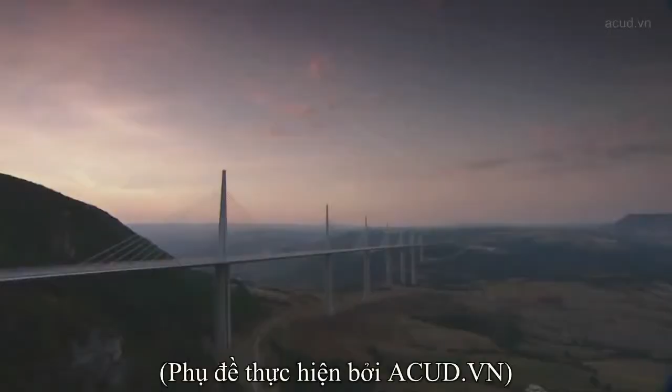This is the Millau Viaduct, the tallest bridge in the world. Its highest tower stretches a staggering 343 meters. So high, the bridge glides above the clouds. But this is a megastructure they said couldn't be built. When I've shown first the drawing of this bridge, they really thought I was crazy.

The team attempting to build this amazing freeway in the sky had to survive landslides, fight winds gusting at 130 kilometers an hour, and weather massive storms as the bridge simply hung in the balance. It's a bridge that pushes the boundaries of engineering to the limits, and then beyond.

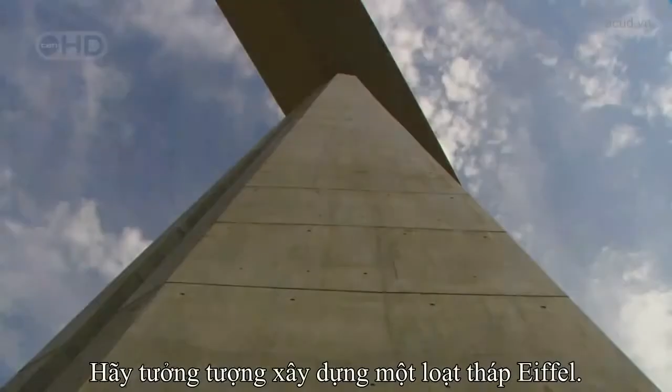Imagine building a series of Eiffel Towers, then slinging a 4-lane highway between them, all the way across one of the deepest valleys in France. Impossible though it sounds, that pretty much describes the building of the Millau Viaduct.

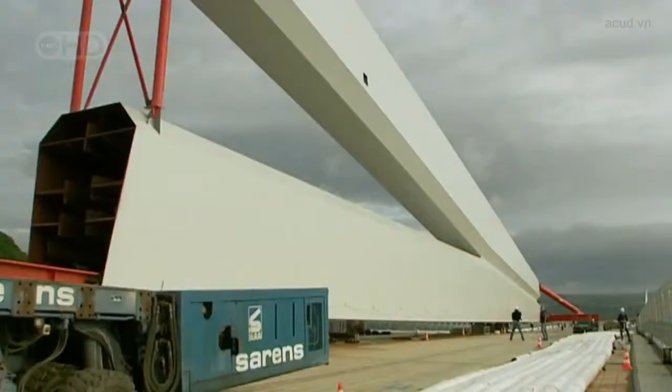From the start, the construction team faced 3 daunting challenges. 1, build the tallest bridge piers in the world. 2, put a 36,000-ton freeway on top of them. And 3, erect 7 steel pylons, each weighing 700 tons. And what's more, they had to do this hundreds of meters above solid ground. So high that if you were on top of the Eiffel Tower, you'd still be looking up at this awesome bridge.

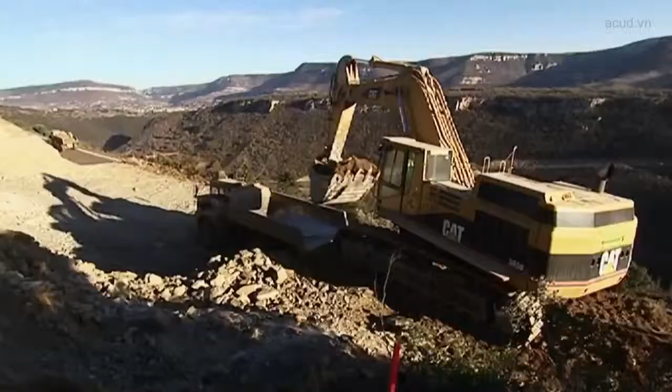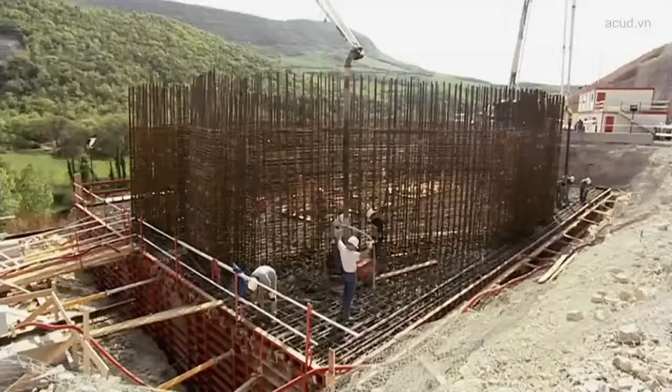October 2001, the team break ground. They're required to build a bridge that'll last for 120 years. And to win the contract, the teams promised to build it in record time, less than 4 years. By comparison, the world's longest suspension bridge, the Akashi Kaikyo in Japan, took a full 10 years to build. To up the ante, any delay will cost them $30,000 a day in penalties.

There are 7 piers that are numbered from the northern end of the valley. Number 1 will pose problems because of the steep slope. Number 2 will be the biggest challenge since it's the tallest. Crossing the river, number 3 is not much shorter. Then 4, 5, 6, and 7 climb the gentler slope to the south.

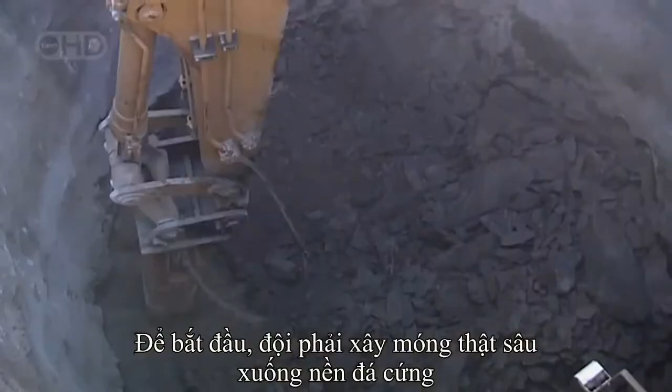To begin, the team had to bury the foundations deep in the bedrock in order to support the enormous weight the bridge will place on them. But the forces of nature were stacked against them. Geologists have warned of the risks posed by the region's fractured limestone. The rock is full of cavities that are essential to the local cheese economy. These cave systems close to Millau are home to a unique bacteria responsible for the blue mold in the world-famous Roquefort cheese. But what's perfect for cheese could be disastrous for a megastructure.

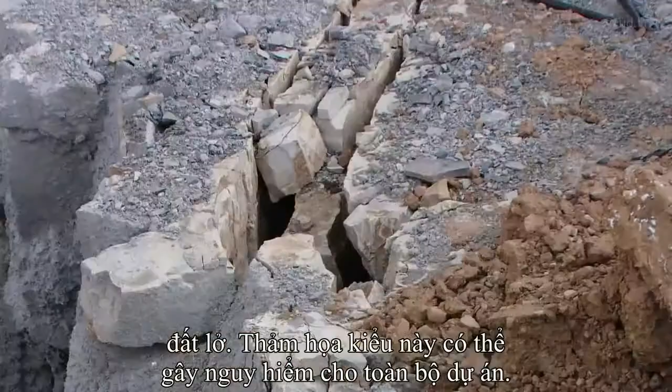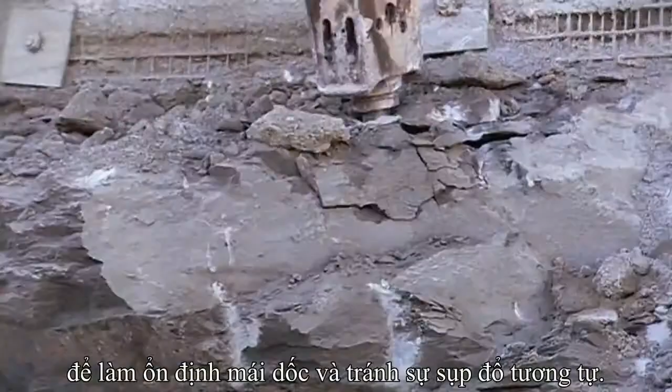The geologist's diagnosis spelt one thing: landslides. This kind of catastrophe could jeopardize the entire project. Despite the warnings, building went ahead as planned. Then, well into construction, as predicted, a dramatic storm causes a landslide. 4,000 cubic meters of rock collapse around Pier 1. Fortunately, the fallen rock doesn't damage the pier, but the warning is clear. They're forced to divert precious manpower and equipment to stabilize the slope and prevent a repeat collapse.

So if the area is prone to landslides, why did they build the world's tallest bridge here in the first place? The answer is simple. In the 1980s, France built a freeway linking Paris directly with Spain. This major artery headed south across the French countryside, while from the Mediterranean, the freeway headed north, until they both hit one of the deepest valleys in France and stopped dead. Welcome to Millau, France's least favorite bottleneck.

The town of Millau is in the mountainous region of the Massif Central, one of the most tranquil parts of France. But in summer, this poor medieval town suffered traffic hell. The locals couldn't take it anymore. Neither could their mayor. It was terrible for our reputation. When you hear every day on the television and radio, avoid Millau, there's a traffic backup, a 5-hour wait in Millau.

And it's not just the people of Millau. Two drivers, Jamila and Jemima, crossing the 30-odd kilometers between the freeway on either side of Millau, reveal exactly why this bridge is needed. Jamila, in car 33, will cross the new bridge, while in car 22, Jemima will take the old road across the valley floor.

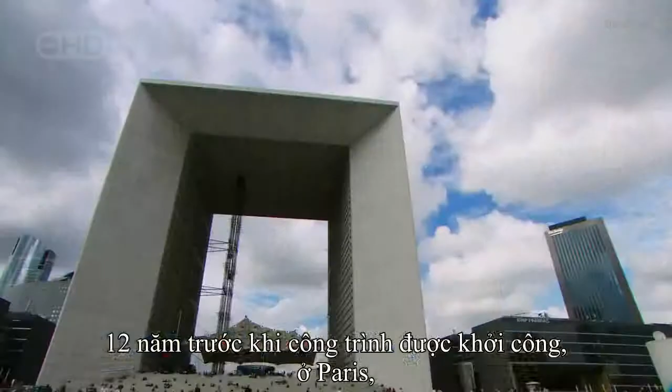12 years before construction began up in Paris, the Ministry of Transport first came up with a plan. Their head bridge builder, Michel Virlogeux, is no ordinary engineer. He's a man who thinks big, very big. Like the Normandy Bridge in northern France, the longest cable-stayed span in the world. With this record-breaking structure completed, Virlogeux was on to his next, Millau.

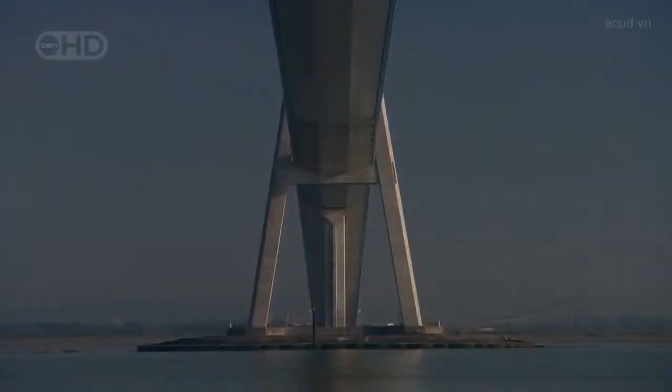His plan, another cable-stay bridge, but pushing the technology beyond anything previously attempted, with piers 4 times higher than the Normandy Bridge. The Millau Bridge would not only be the world's tallest, it would be unlike any bridge ever constructed. When I first showed the drawing of this bridge to the authorities, they really thought I was crazy.

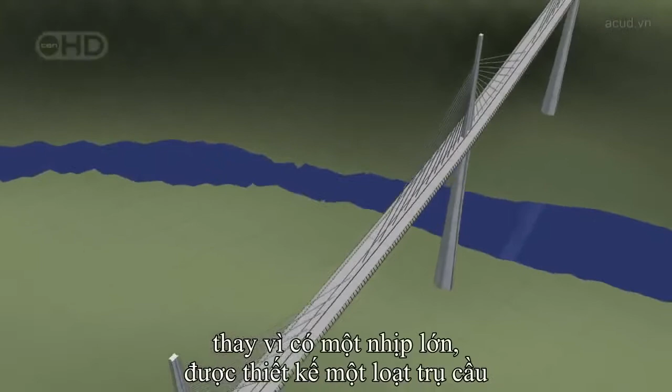Virlogeux's Normandy Bridge has 2 sets of cables supporting the deck. But he wanted to up the stakes for Millau by losing 1 row of cables, so the remaining line would be forced to do twice the work. More dramatically, the 2.5-kilometer Millau Bridge, instead of having a single main span, needed a whole series of piers to support it across the valley. No bridge builders had ever attempted a multiple-span, single-line cable-stay bridge on this scale before.

The French authorities had a problem. Nervous about Virlogeux's groundbreaking scheme, they held a competition inviting other engineers and architects to compete with different designs. The winner, Lord Norman Foster, is one of the world's superstar architects. In Hong Kong, he built the world's largest airport terminal. In Barcelona, offices literally hang from a mast on his communications tower. This is a man who regularly contemplates the impossible and delivers.

You know, it's the challenges, and it's one challenge on top of another, on top of another. And with Millau, one of the biggest challenges was making it fit into the landscape, given it's just down the road from the famous Gorges du Tarn, France's equivalent of the Grand Canyon. How do you make something which has to be so immensely strong against the forces of nature look very gentle, very delicate? How do you weave something on that scale into the most unbelievable landscape?

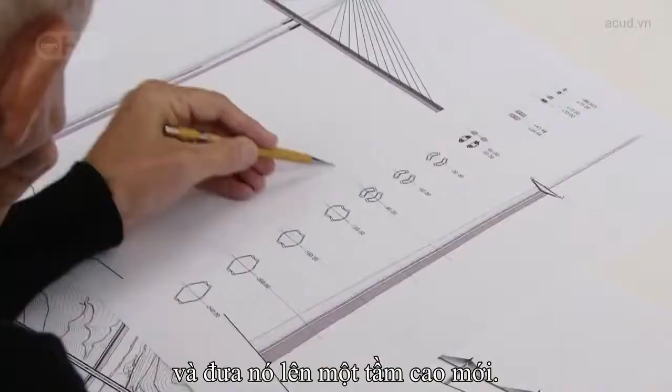Ironically, Foster's answer was to take Virlogeux's pioneering scheme, then push it one stage further. He turned an elegant piece of engineering into a delicate work of art by boldly cutting out 2 of the 9 original piers and seriously slimming down the remaining piers and road deck. Foster wanted the bridge to appear as delicate as a butterfly, but this butterfly has to support the weight of 5 Eiffel Towers in gale-force winds hundreds of meters above the River Tarn. Getting the design wrong would be a disaster.

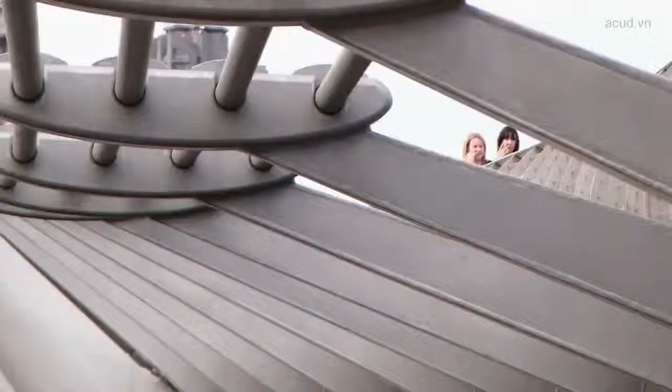Then, with Millau still on the drawing board, Foster's record as a bridge builder suffered a major setback. His Millennium Bridge in London is actually another record-breaking structure, the lowest profile suspension bridge in the world. But when this footbridge opened to the public in June 2000, it was a public relations disaster. Crowds walking over it set up a resonant frequency, and the bridge began to sway. As people adjusted their step to the small initial wobble, the effect was magnified.

Though it didn't threaten the structure, the swinging motion became so dramatic, the authorities closed the bridge for a refit that took 1.5 years and ended up costing over $8 million. It was a bad omen for the Millau Bridge, where construction was soon to begin. And at 15 times the height, a design flaw would be a catastrophe.

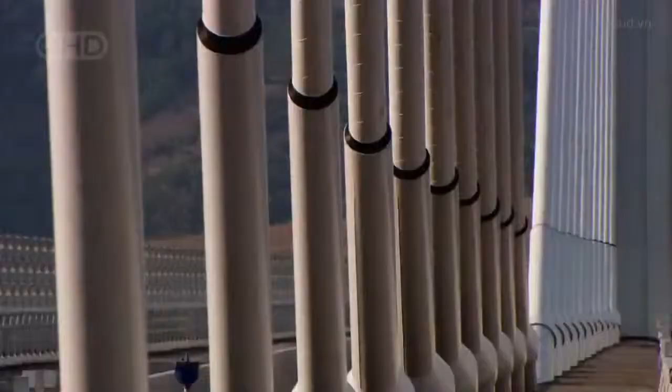December 2001, France's Millau Viaduct, the tallest bridge in the world, is under construction. Everything about this project is supersized. It'll need 200,000 tons of concrete, so much that the team have to build a concrete factory on site. But there's nothing straightforward about this concrete. The formula must be just right.

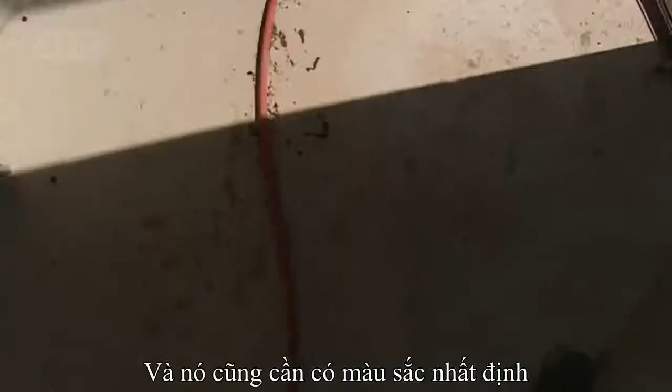It needs structural strength to support the massive loads it'll have to bear. But it can't set too quickly, as it has to be hoisted into position and poured hundreds of meters in the air. And it needs to be just the right color to suit Norman Foster's vision. In fact, the architect's vision has created a headache for the construction team. He's designed each pier as a complicated geometric shape, tapering the entire way up with vertical grooves set into them to create shadows. But what's just a line on paper for the architect was a major challenge to build.

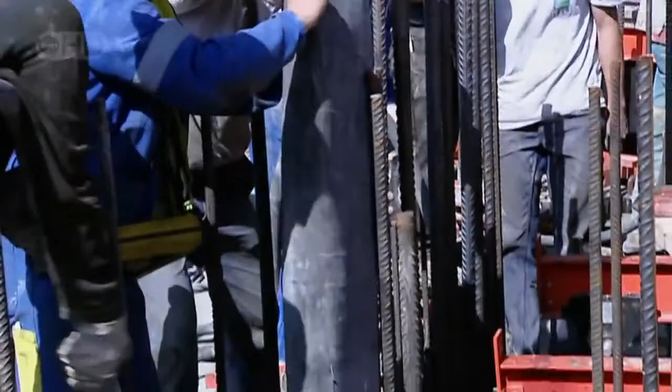The enormous piers are built step by step by pouring concrete into a temporary mold. To give the required strength, the molds are filled with a frame of steel reinforcing bars. In total, 16,000 tons of these steel bars are hoisted into place and secured. Laid end to end, they'd stretch the 4,000 kilometers from Millau all the way to Central Africa.

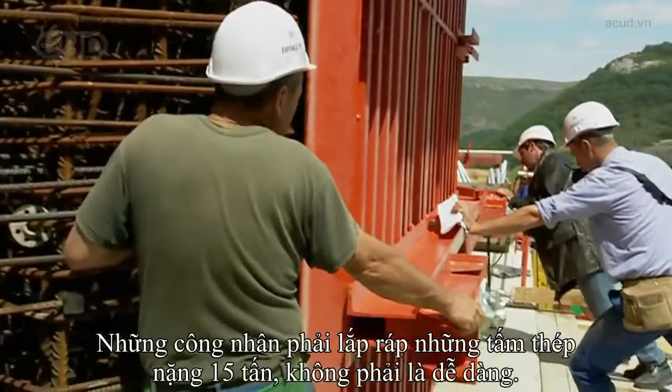The shape of each pier is seriously complicated. As a result, each time they remove the sections of red steel shuttering, they have to change the shape of the mold to fit the profile of the next 4-meter section. Manhandling these steel panels weighing up to 15 tons apiece is no picnic. And with the combined height of the 7 piers totaling well over 1 kilometer, they have to change the shape of the mold over 250 times.

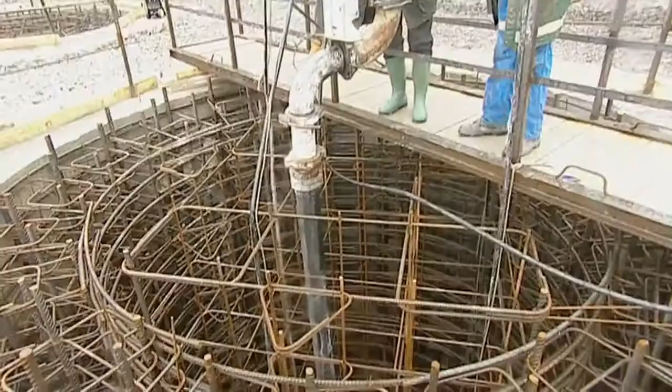Every 3 days, each team on each pier went through this whole cycle. Then they repeated the process. But it was a race against time, with a permanent threat of delay. Keeping the entire build on time and to budget was the daunting responsibility of one man, Jean-Pierre Martin. If instead of 3 days we took 4, imagine that multiplied by the number of castings. We'd end up with a 3 or 6 month delay. With a penalty of nearly $1 million a month, this isn't something Martin wanted to contemplate.

And this schedule wasn't his only headache. You have to be pinpoint accurate when you're building the tallest bridge piers in the world. Get it wrong, and the bridge simply won't fit together. Just 10 centimeters out, about a hand's width on each 4-meter section, and the tallest pier could be 6 meters off at the top, the width of a jumbo jet fuselage.

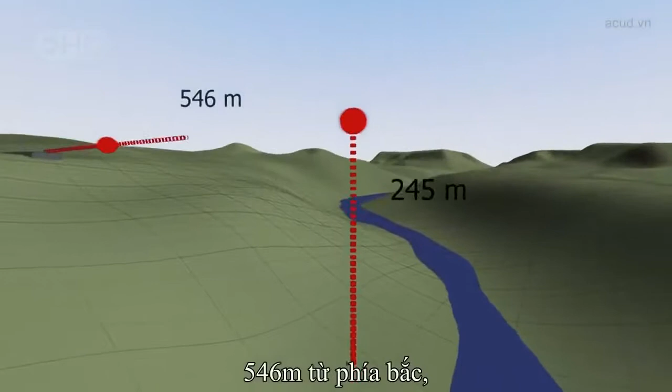Each team was aiming for a specific point in the sky. For Pier 2, this was exactly 245 meters above the ground, 546 meters from the north side, and 1,914 meters from the southern end. There was no room for error. The only chance they had to get it right was with GPS, accurate to within 4 millimeters. Using signals from multiple satellites, the team could pinpoint their position and make sure they're on target for that critical point in the sky they needed to hit.

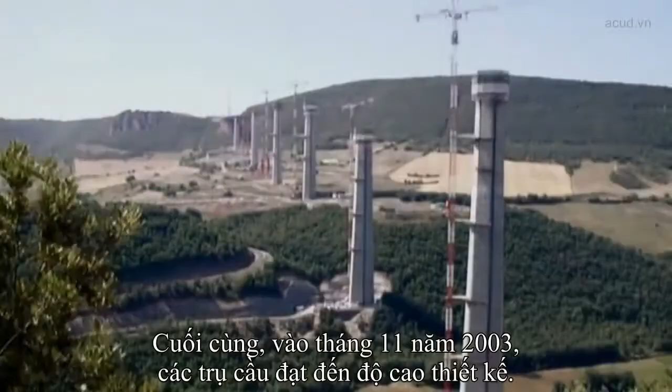Month after month, the piers climbed higher. Finally, by November 2003, they reached their full height. At 245 meters, Pier 2 becomes the highest bridge pier in the world. But is this record-breaking pillar where it's supposed to be? Amazingly, it's dead on target, to within 2 centimeters. Champagne corks pop. It's time for a major celebration. Against all the odds, they were 1 month ahead of schedule, but the team couldn't afford to relax. The next stage of the project would be the most difficult part of the build.

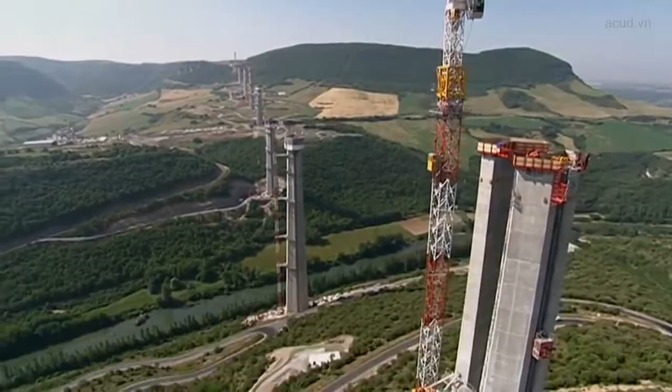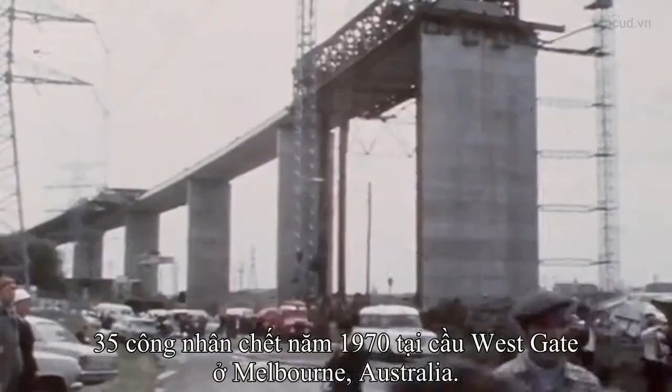Phase 2 of building the world's tallest bridge involved putting a 2.5-kilometer roadway weighing 36,000 tons on top of the piers, a full 270 meters above the River Tarn. Bridge builders know danger comes with the territory, but working at these heights can be lethal. More than 34 died constructing New York's Brooklyn Bridge. 35 died in 1970 on the West Gate Bridge in Melbourne, Australia. And 1 year later, 13 workers were killed when the Koblenz Bridge in Germany collapsed into the Rhine.

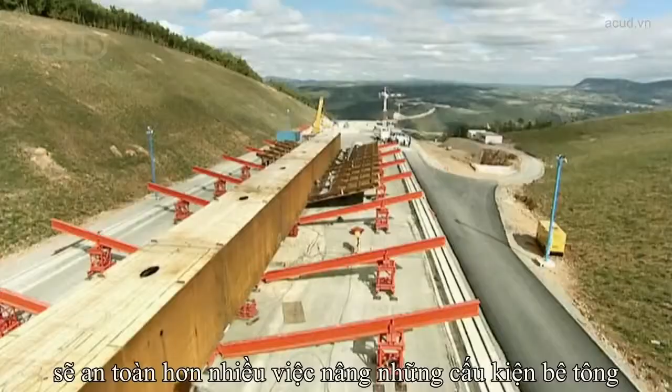With these fatalities in mind, the team decided to fabricate the entire road deck on the safety of solid ground. This meant building it in steel, which in theory would be much safer than lifting vast concrete sections hundreds of meters into position. There's only one problem with this plan. No one had ever put a road deck on piers anything like this height before, let alone over a 2.5-kilometer span.

In the end, only one steel manufacturer had the courage to take on this colossal challenge. Eiffel, the steel firm set up by the great French engineer. Eiffel built what was once the tallest bridge in the world, the Garabit Viaduct in southern France, before getting round to the framing for New York's Statue of Liberty and, of course, his signature tower in Paris. But despite the company's experience, Eiffel's director, Marc Buonomo, knew he was taking a serious risk.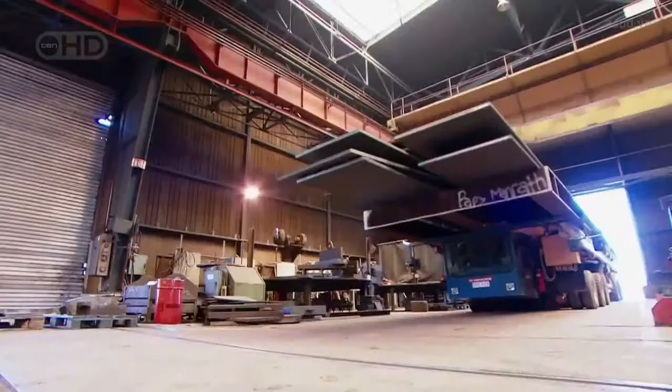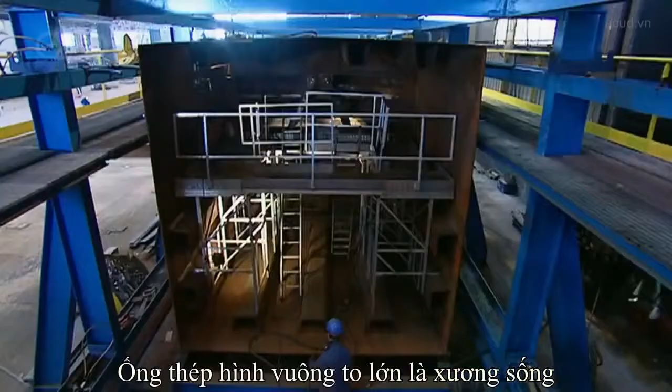They fabricated the massive sections that would make up the road deck in the company's steel factories. This immense jigsaw puzzle involved manufacturing 2,200 separate sections, weighing up to 90 tons and some of them 22 meters long. Their accuracy is measured with a laser to within a fraction of a millimeter. The huge square tubes are the central spine that should make the deck rigid. The triangular side panels will be welded on either side to create the width for a 4-lane highway.

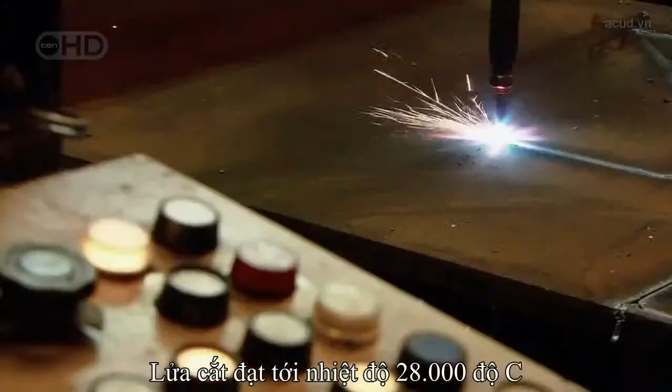To meet the punishing schedule, Buonamo automated the manufacturing with a 2-headed welding robot and a plasma cutting machine. Each cutting pattern or template is programmed into the computer. Then the machine automatically blazes its way through the steel. The torch reaches a scorching 28,000 degrees centigrade. That's 5 times the temperature of the Earth's inner core.

But cutting and welding was the easy part. The hard part was getting these monster sections the hundreds of kilometers from the factories to Millau. The routes had to be planned with precision to avoid major damage. The police coordinated safety and clearances. Even with that level of preparation, some obstacles felt as if they're cutting it just too close for comfort. And this was no one-off event. To build the viaduct took over 2,000 of these extraordinary road convoys.

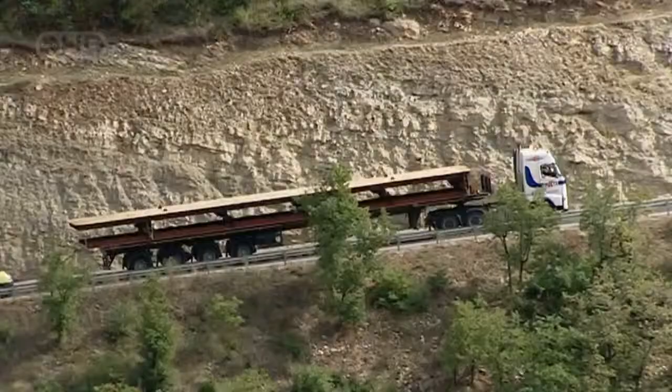The components arrived at assembly plants set up, one on either side of the valley. Here, the pieces of the massive jigsaw puzzle were welded together to form the 2 halves of the deck. But getting these 2 halves to span the valley on top of the world's tallest bridge piers would be a major challenge. They'd be the first team to put a road deck on a pier taller than an 80-story skyscraper.

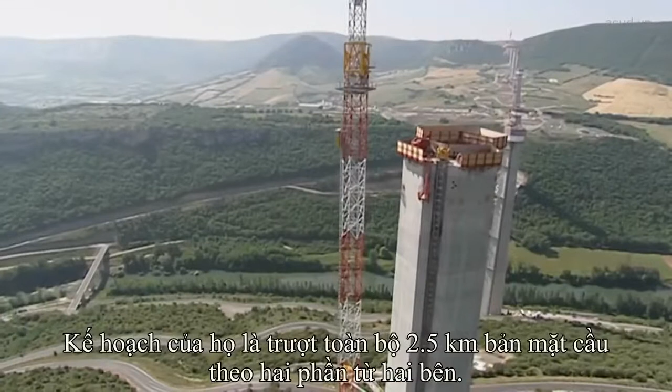And pushing bridge building beyond anything attempted before, they planned to slide the entire 2.5-kilometer road deck over in 2 colossal pieces. The bridge's chief engineer, Jean-Marie Cremer, was one of the few people who believed it could be done. All the engineers who know this method, who were in the know, didn't believe it was possible. If the team had got their calculations wrong, the entire structure could collapse into the valley.

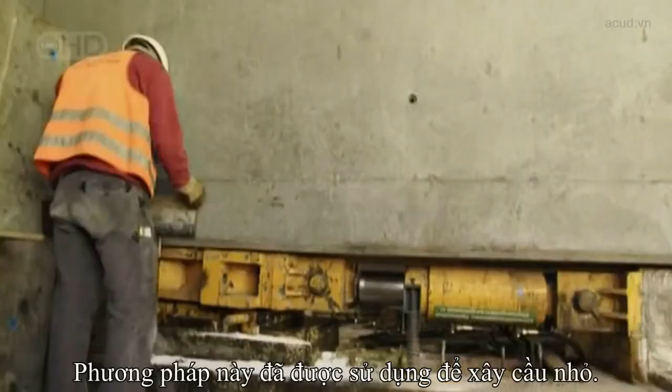We found a solution for the construction, which was to launch the bridge from the 2 sides. One part on the Larzac Plateau, one on the Rouge Plateau. And to push them from the 2 sides and to make them come and meet here above the River Tarn. Smaller bridges use a similar technique. A powerful set of hydraulic rams literally pumps the deck from one side to the other. But Millau would be the longest launch ever attempted over the highest piers in the world, and the results could spell disaster.

The deck is so slender, it would bend and collapse if it were pushed out over the 342-meter spans between each pier. The furthest anyone's previously managed is less than half that distance. The first part of the solution was simple. Fit a pylon so its cables support the front of the deck as it goes out over the valley. Then construct temporary steel support towers that halve the spans to a more manageable 171 meters.

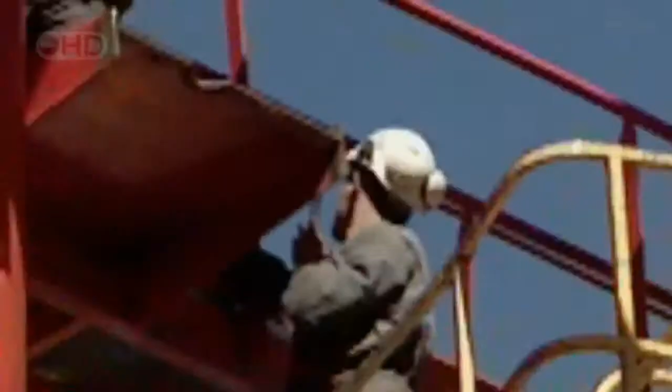These steel towers were a construction feat in themselves. The largest, over 170 meters high, is the tallest ever built, and they needed to carry a massive load: 7,000 tons as the leading edge of the deck, together with the first 90-meter pylon, slide over. And simply pushing this enormous weight over the top of the vulnerable piers would bring them crashing to the ground. This was the nightmare scenario. If we'd done a conventional launch, we would have knocked the piers over like the pins in a bowling alley.

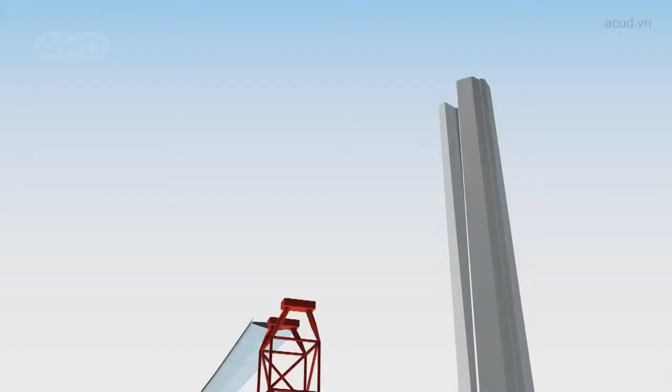Someone needed to reinvent the way this type of bridge is built. And it's Marc Buonomo with Jean-Marie Cremer who came up with the breakthrough. The basic principle can be demonstrated with a heavy box and a wobbly table.

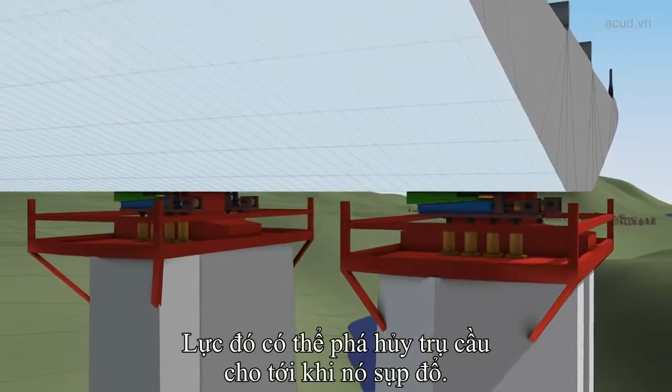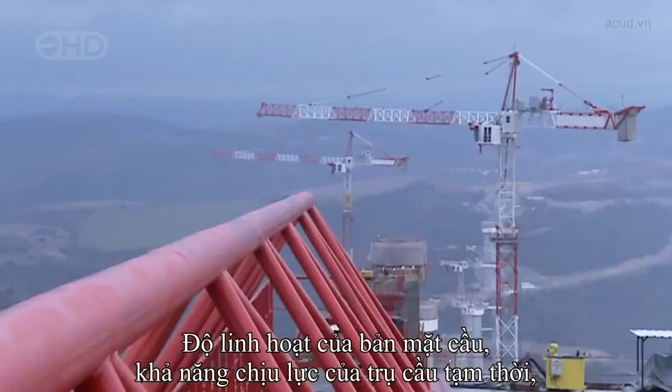When you're up there and you see Millau 300 meters below you, you ask yourself, was this a good idea? The future of the entire project was now hanging on a prototype, and it had never been tested. It's the morning of February 26, 2003. Do or die day for the world's tallest bridge. Everything is about to be put to the test. The flexibility of the deck, the strength of the temporary piers, and critically, the pioneering hydraulic ram system.

Even Buonomo, the man in charge of the launch, had his doubts. As it had never been done before, I have to tell you, I had fears that it wouldn't work.

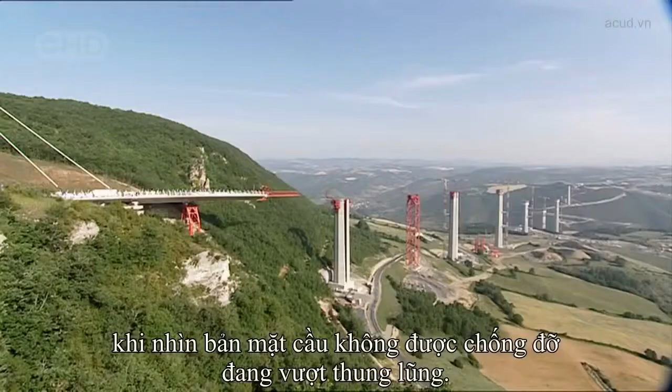Every 4 minutes, the deck advanced 600 millimeters across the valley. Surveyors tracked its progress. But it was still a nail-biting time as they watched the unsupported deck crossing the void. Eventually, the deck reached the safety of the first pier. 204 meters down, only 2,256 to go. The launching system seemed to be working as planned. The engineers were feeling optimistic.

But as the deck advances into space, it'll become more vulnerable to the wind, which can reach 130 kilometers an hour. Unfortunately, the road deck has the shape of an upside-down airplane wing, and the team's greatest fear is that this wing could simply take off.

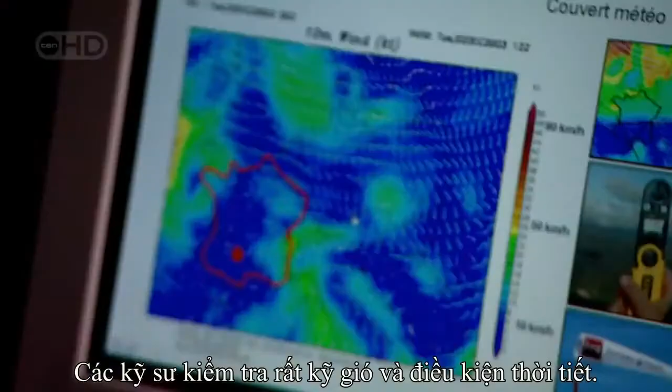The engineers kept a close eye on the wind and weather conditions. When they were satisfied there was a 3-day weather window and the wind wouldn't exceed 85 kilometers an hour, they'd give the construction team the go-ahead, and the deck launch could continue. The reason for this precaution is simple. Strong winds can literally tear a bridge apart.

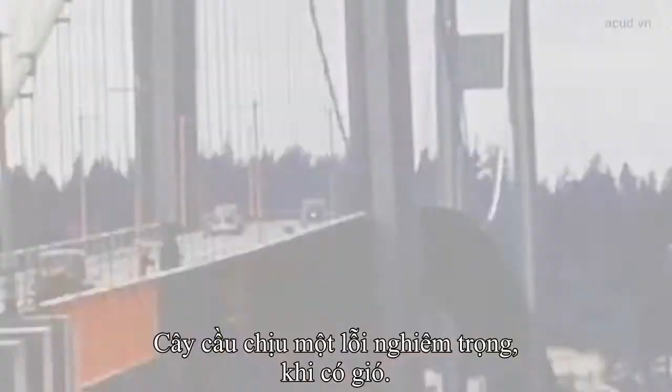In 1940, Washington State built a suspension bridge across the Tacoma Narrows in the US Northwest. It opened with a grand ceremony on July the 1st. But the celebrations were short-lived. The bridge had a major problem: the wind. Girders beneath the deck, designed to make the bridge rigid, actually blocked the wind, causing the roadway to ripple alarmingly. Locals soon dubbed it Galloping Gertie.

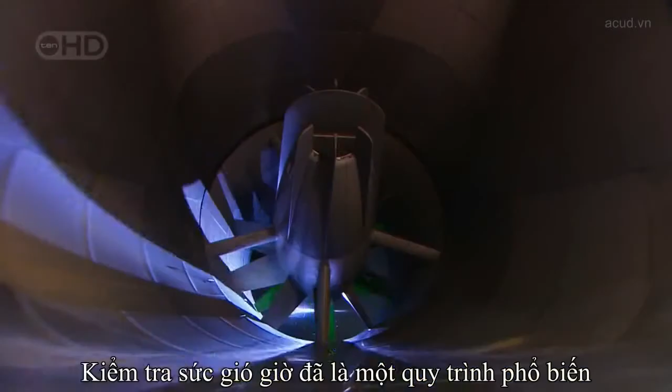On the 7th of November, with the wind less than 70 kilometers an hour, the bridge begins to twist violently. At 11 a.m., time runs out for Galloping Gertie. The wind sends the bridge crashing into the river. Wind tunnel testing is now standard procedure as a direct result of Galloping Gertie.

For the Millau Bridge, they analysed the wind in the Tarn Valley over 18 months, then recreated those conditions in the wind tunnel. Wind engineer Olivier Flamand was shocked by the results. The average wind speed was relatively low, but because there's such strong turbulence, it created very fast peak winds. The rugged terrain creates serious turbulence at the height of the road deck. Winds peak at 130 kilometers per hour. That's hurricane force.

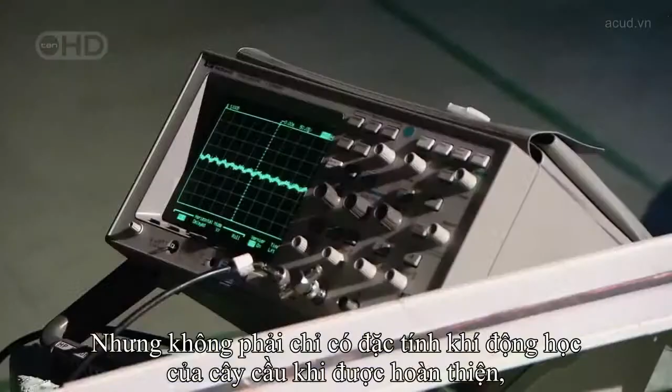They tested every aspect of the bridge to analyze the risks: piers, pylons, and critically the deck. But it's not just the aerodynamics of the finished bridge. They needed to find out how it would behave when it was most at risk, during the launching of the deck.

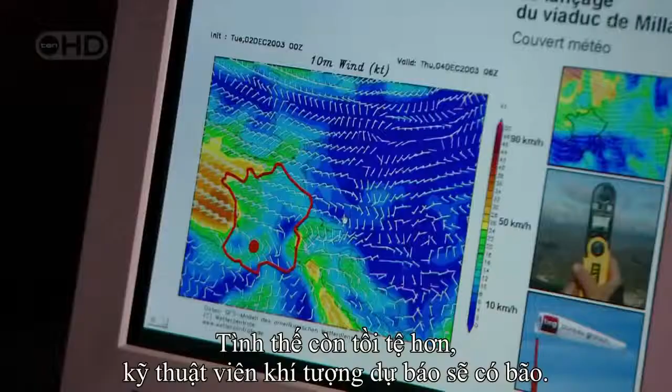Olivier and his team reached a chilling conclusion. The winds they've measured are strong enough to blow the unsecured deck off its supports and send it crashing hundreds of feet to the valley floor. And then the nightmare began. On the 2nd of December 2003, 6 months into the deck launch, one of the launch systems failed, leaving the deck hanging in the wind. To make matters worse, the weathermen were predicting storms.

So far, these massive pushing machines had worked perfectly. But the fact is they were prototypes, and due to the frantic schedule, they'd never been tested. The problem was that the non-stick Teflon between the sliding surfaces had ripped, and the friction generated was too much for the hydraulic rams to push against. Unfortunately, no one had planned on replacing parts of this monster machine mid-launch on the top of a massive concrete pillar. This was very bad news for the man who staked his reputation on this system.

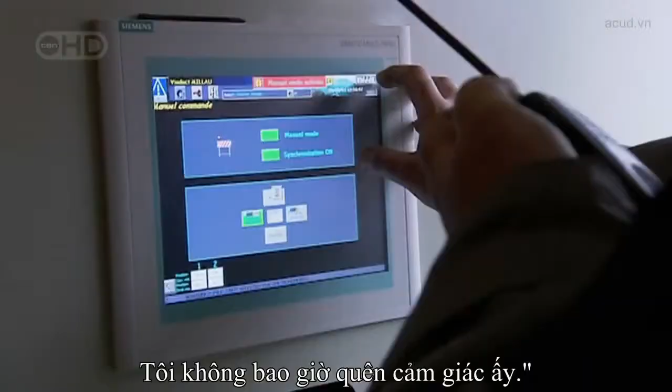Re-examining their calculations, they realized the cause of the problem. They'd underestimated the forces between sliding surfaces, but they wouldn't be able to repair it without the necessary spare parts. The clock was ticking, and Marc Buonomo needed a solution fast. When Apollo 13 came back with that incident, the NASA engineers requested they did the inventory of everything there was on board to know how to fix it.

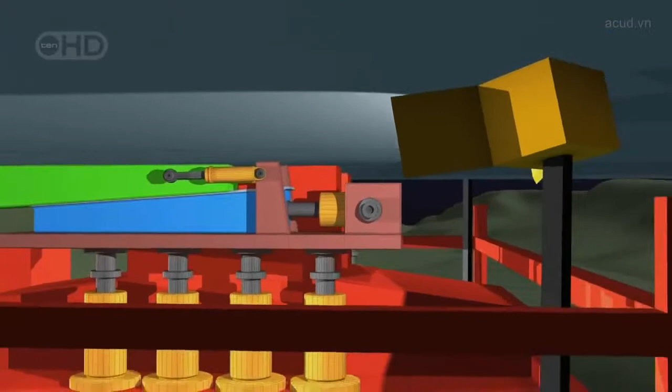The Millau team did an inventory. They realized that the other launching machines, not yet being used, could be stripped to provide the new Teflon surfaces they needed. Working all through the night, the team extended the access platform. This allowed them to take out the 5-meter-long, 2-ton steel wedges, replace the Teflon, and reassemble the launching machine. By 8 a.m. the next morning, it was ready to resume the launch.

The rest of the week, the predicted storms arrived, and another set of launching machines wore out. So when the deck finally made it to the safety of the next pier, the team breathed a major sigh of relief. You don't forget that. I won't forget that for 4 hours I was really scared. The two decks continued their journey across the valley. Day after day, week after week for a full 14 months, they approached each other, millimeter by millimeter.

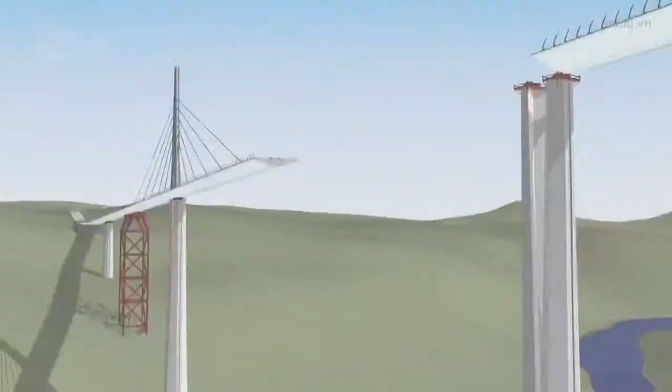By May 2004, they'd reached a critical phase. From the northern end, the shorter deck had traveled 717 meters into space to reach its final resting place. From the south, the longer deck extended over 1.5 kilometers. Only the section over the river, the one point where it was impossible to erect a temporary pier, divided them. But would they meet as planned? If they've got their calculations wrong, they'll have built the biggest white elephant in Europe.

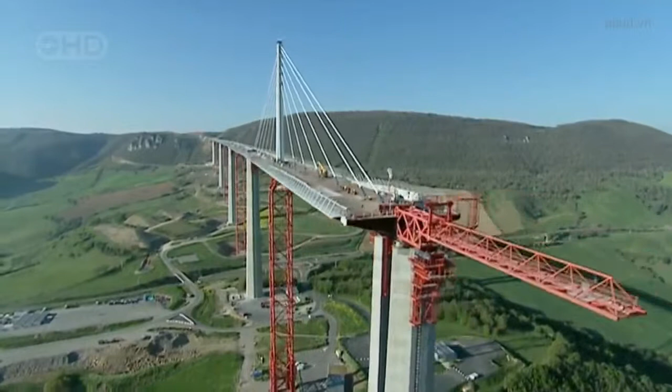Even the man behind the whole project had his doubts. I was not convinced at all that the two parts of the deck could meet exactly with a perfect geometry. The odds were against them. Calculating such a feat so precisely is a Herculean task. Firstly, the two starting points on the northern and southern slopes of the valley are at different heights. Secondly, the bridge has a subtle curve to it. As a result, each steel panel which makes up the road deck had to be cut and welded with extreme precision. It would be an engineering triumph if they got these two sloping curved decks to meet as required.

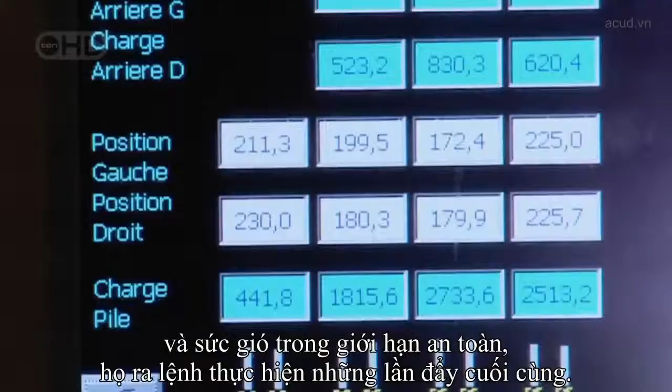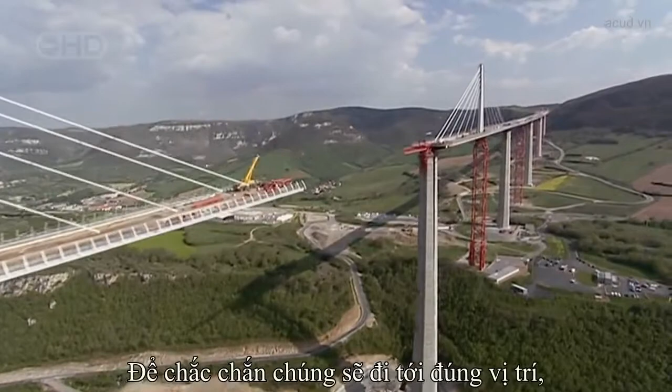The team checked the weather reports. With the wind inside safety limits, they gave the go-ahead for the final push. The rams began to drive the deck's leading edge off the safety of Pier 3 towards its destination. At this point, a total of 21 launching systems needed to move at exactly the same moment to avoid disaster. If anything were to go wrong now, the man responsible would be Marc Buonomo. Everyone asked me, how can you be sure that it will go straight? So to be sure that they were going to the right place, I had a GPS put on the front, so I could see the gap between the theoretical and the real position.

Over the next 2 days and nights, the deck advances 600 millimeters at a time towards its final resting place. The world's media are watching the critical meeting of the decks, and to add to the pressure, the French Prime Minister is due to drop in to celebrate the event. The deck pushes forward. Now, with only centimeters separating the two sections, a magnum of champagne is hung between them to mark the moment.

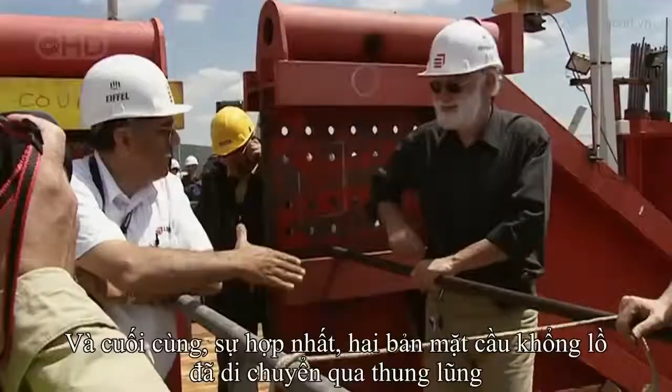At last, union. The two massive steel decks have traveled high over this valley, a total of 2.5 kilometers, and when they check, they're aligned to within 1 centimeter. That's accurate to within 99.9999%. All the measuring, all the calculations have paid off. They've nailed it.

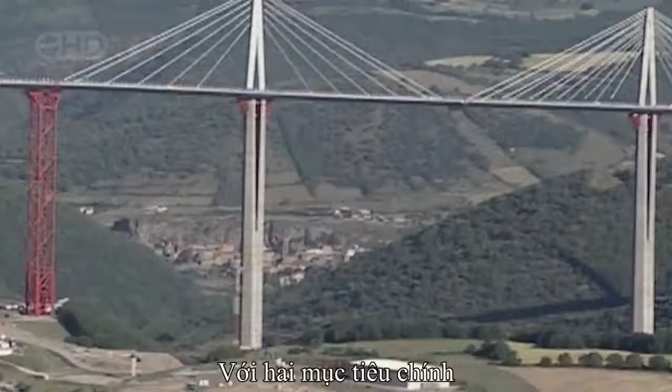The meeting of the decks was a special moment. News reports traveled round the world, and in Salzburg, Austria, they reached Felix Baumgartner, aka Felix the Conqueror. Felix has made a career base jumping from some of the tallest structures on the planet, and within 24 hours, he'd driven to Millau and was calculating the logistics for the jump, factoring in his two main aims, to avoid arrest and death.

Baumgartner waited for darkness before arriving on site. He found his way to the base of Pier 2, then climbed an access ladder the full 245 meters to the top. He entered the steel road deck and found a place to hide until daybreak. He had to remain concealed until the sun was high enough for his cameramen to record his world record attempt.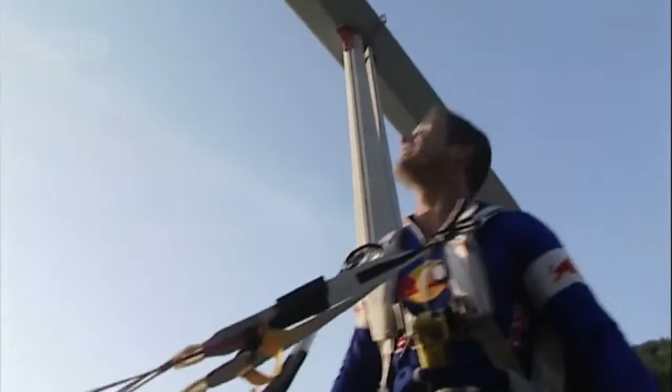At 7 a.m. the following morning, Felix the Conqueror emerged. He took a cool backward flip off the tallest bridge in the world and entered the record books. The tallest bridge in the world, 250 meters. I did it. And having evaded death, he made sure he's not caught by the police.

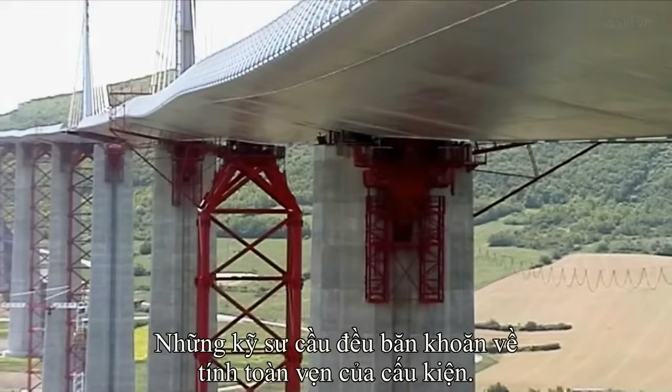The decks have been joined, and the team have reached the final phase of the project. But there was still a race to meet the schedule, and their problems weren't over yet. Everyone could see the dramatic undulations in the flexible steel deck. Even some hardened bridge builders wondered about its structural integrity. It was a huge surprise for everyone. All the engineers said, we knew steel was flexible, but not that flexible.

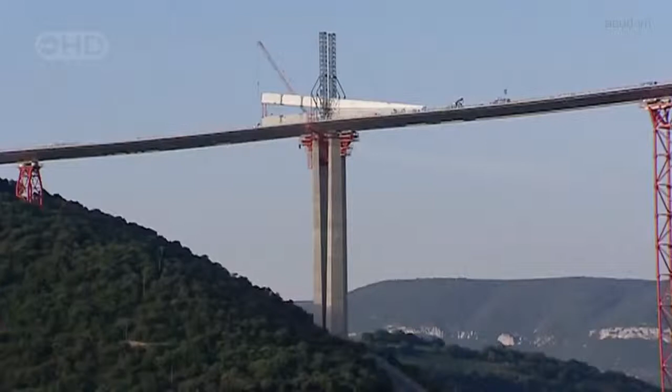The team were relying on the pylons and cables to pull the deck straight. Each massive pylon is 90 meters high and weighs 700 tons, the equivalent of 85 London buses. Placing them in position on the slender deck, high above the valley floor, would go beyond anything ever attempted. Once again, Marc Buonomo had a plan. You know, the first people to make vertical pylons were the Egyptians. Buonomo adapted a technique used in ancient Egypt to erect obelisks in the sands.

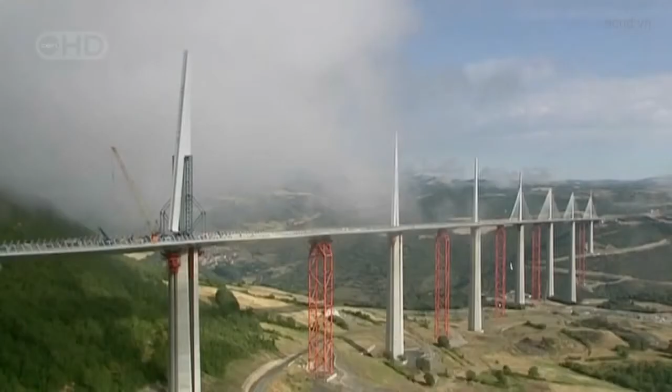On top of the road deck, the team put up two enormous steel towers, both of them secured by cables and equipped with a hydraulic system capable of raising 1,000 tons. The 700-ton pylon is then lifted by the hydraulics. As it rises, it pivots little by little until it's vertical. It's then lowered safely onto its anchorage point. Buonomo's 4,000-year-old technique worked to perfection.

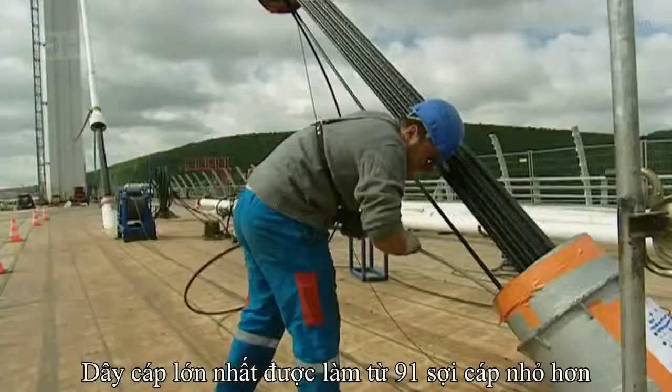With all 7 pylons in place, the team could attach the cable stays that would straighten the rippling deck and give it the strength to cope with full traffic loads. They hope. The weight of the roadway is now over 40,000 tons, the equivalent of a cruise ship, and the 154 cable stays should prevent it from sagging or collapsing. The strongest stays are made up of 91 individual steel strands and have a breaking strength of 25,000 tons, strong enough to hold back 25 jumbo jets, all at full throttle.

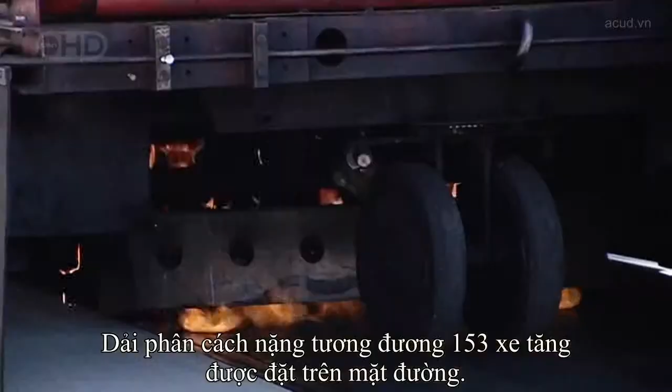As the cable stays are tensioned, true to plan, the ripples in the road deck are pulled straight. Over the 2.5-kilometer deck, the ripples are now no larger than the size of a thumb. They're finally on the home straight. The road surface goes on, adding a further 10,000 tons to the load. That's like driving 153 battle tanks onto the deck. But before it could open to the public, the team needed to know the bridge is safe. It would have to pass one crucial test.

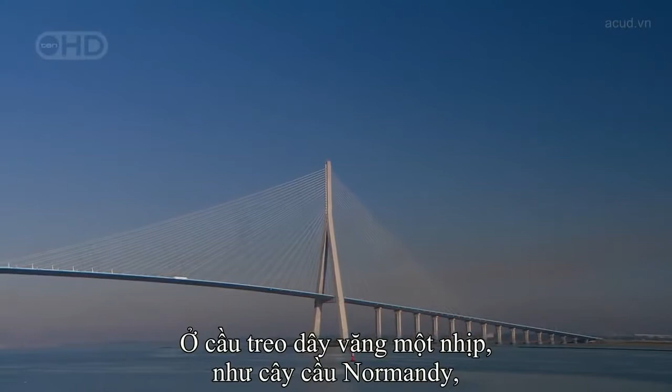After 3 years, the construction team building France's Millau Viaduct, the world's tallest bridge, are about to find out if they got their calculations right. On a single-span cable stay bridge like the Normandy Bridge, a large load on the main section is no problem because the cables are attached to solid ground and can't give.

On the Millau Viaduct, with its 8 spans, the cables are attached to the deck of the adjacent sections. A load on one section will cause it to drop, pulling the stays down. As the pylons lean in, the matching stays are pulled upwards, lifting the neighboring decks and causing a dangerous rippling effect.

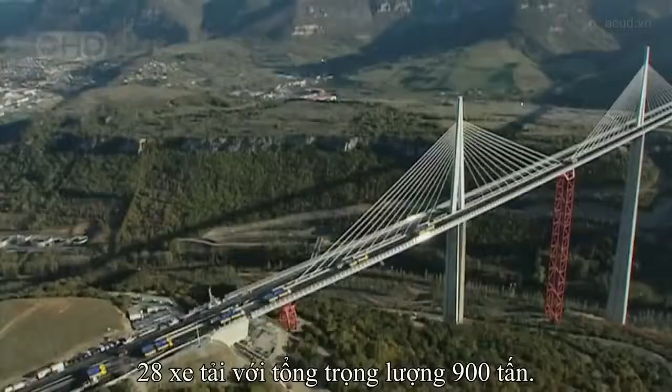It's right now the team put their bridge to the test. These 28 trucks have a combined weight of over 900 tons. They are now positioned in the critical point, mid-span. The engineers hold their breath. Measurements are taken. The span bends just 26 centimeters. This is a triumph for the engineers. The bridge was designed to cope with more than double that.

4 weeks later, on December the 14th, 2004, President Jacques Chirac officially opened the Millau Bridge. A proud moment for the whole of France. Just over 3 years of construction have produced the tallest bridge in the world, designed to last at least 120 years. And against the odds, the project manager even brought the job in on time. But that's not what he's most proud about. What I remember, because on construction sites there are often accidents, is that we had no serious accidents, nothing more than a minor injury.

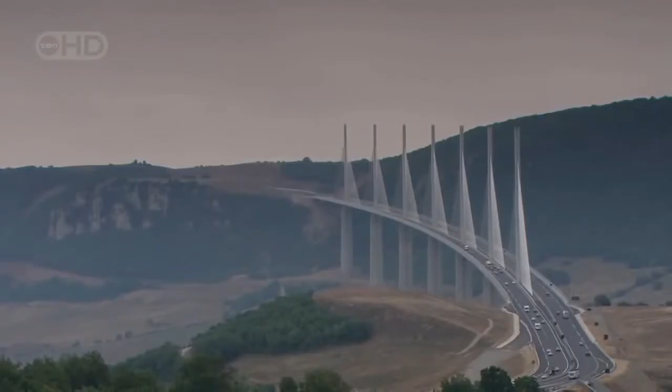As soon as it opened to the public, the bridge was an instant success. But the real test isn't till its first summer, when the French all take their annual vacation. No one ever expected anything like this. Numbers peaked at more than 50,000 vehicles a day. At over $7 per car, that's great news for the construction company, who are clawing back their $478 million investment in the project.

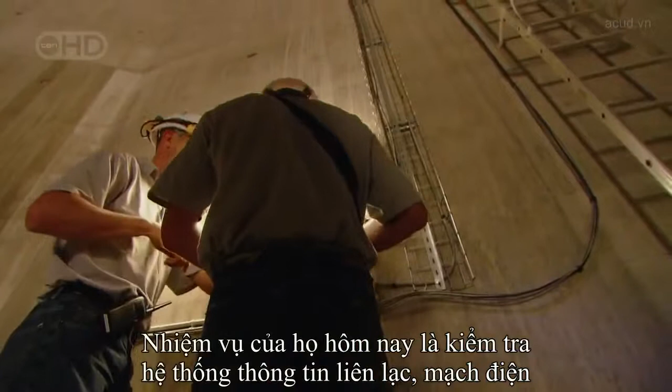This was an epic bridge to build, but it's just as epic to maintain. Thierry and Frank are assigned to P2, the world's tallest bridge pier. This structure is no solid concrete block. It's a series of vast hollow spaces. Their job today is to test the communication system and electric circuits on each of the 7 structural floors. This involves a 343-meter climb, going hand over hand up a ladder for the rest of the day.

By dusk, when Thierry finally reaches the summit of the pylon, he may be exhausted, but there is a payoff. You get a fantastic view from here, a 360-degree panorama. The tallest bridge in the world has become an icon. But this is creating problems no one had ever imagined. Locals have been taking over the bridge as a platform to get media attention for their causes. This crowd was hoping that driving sheep over this freeway in the sky would help them get more farming subsidies.

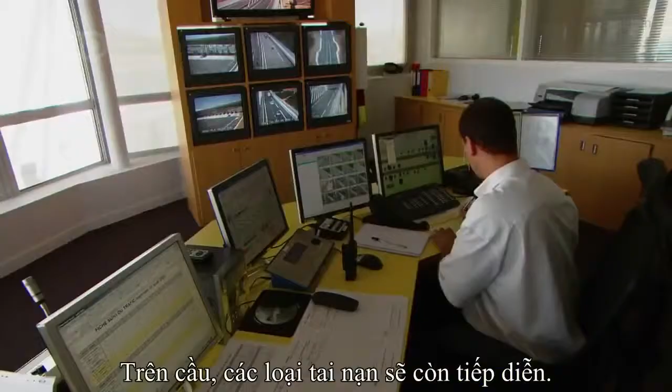Jose's job is to prevent this kind of incident from creating a danger, and on this bridge, the incidents keep on happening. An alarm triggered by a motion detection system means there's a stopped vehicle on the bridge. Immediately, Jose dispatches a colleague to deal with the situation. The last thing anyone wants is a multi-car pile-up on a 2.5-kilometer bridge, quarter of a kilometer in the sky.

Jose zooms in his camera to reveal the man has left his car and is sitting dangerously on the crash barrier. The driver's probably only broken down, but already one man who stopped climbed over the wind barrier and jumped to his death. Bruno intervenes. Thankfully, it's no more than an irresponsible photographer who's sent on his way.

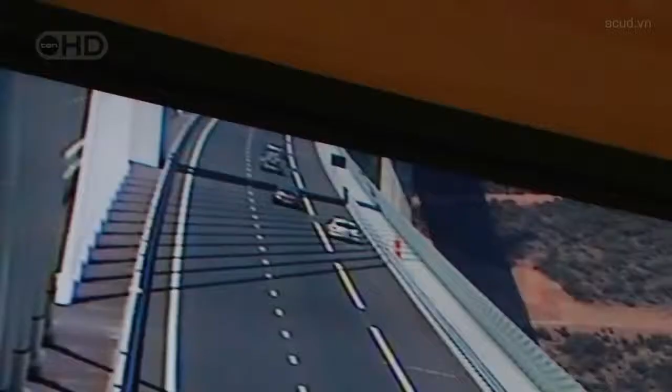You could say the Millau Bridge is a victim of its own success. It's definitely become a major tourist destination. 700,000 visitors in the first 9 months. Fortunately, most of them wait till they're off the bridge to take their photos. It's magnificent. I came 600 kilometers today to see the Millau Viaduct. There's only one thing to say. It's extraordinary. They're drawn because it's a world-beating structure, but also because it's incredibly beautiful, delicate, and minimal. Not what you'd expect from a structure that's nearly a third taller than any other bridge on the planet.

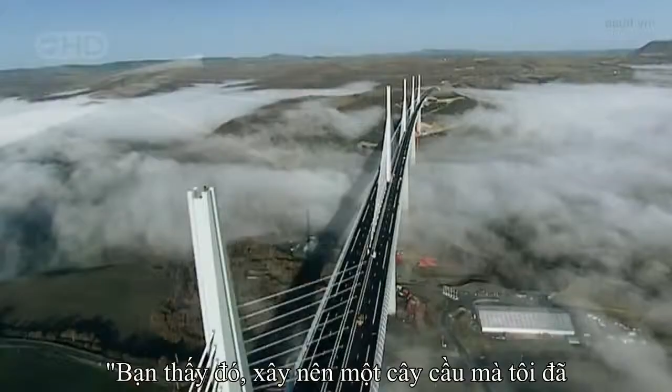And architect Lord Norman Foster's achieved his aim to give the driver the sensation of soaring. As you leave these plateaus, you do fly. You fly across this bridge. Literally, you are above the clouds. And the result certainly pleases the man who dreamt it all up. To see erected this bridge, which I imagined 15 years ago, it's something magic. This is the longest pure cable stay bridge in the world, the tallest roadway in the world, and of course, at 343 meters, it is the tallest bridge ever constructed.